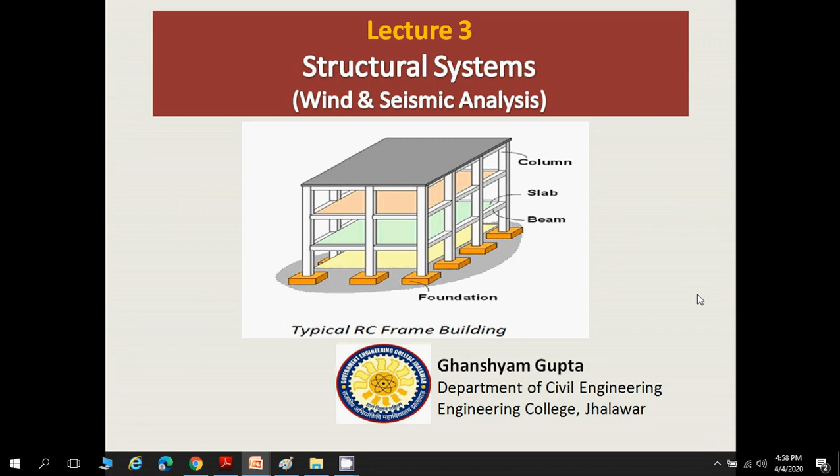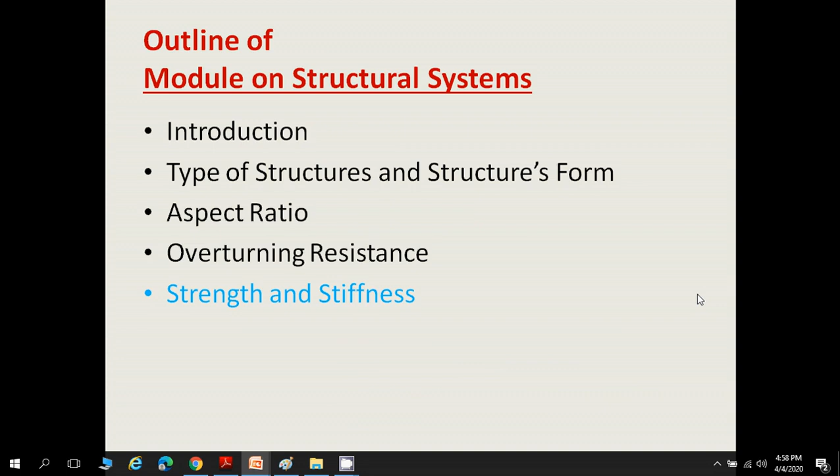Hi, welcome to lecture 3 of structural systems, on wind and seismic analysis. The outline of this module has already been discussed, and the above four topics were covered in lecture 1 and lecture 2. Today we are discussing strength and stiffness.

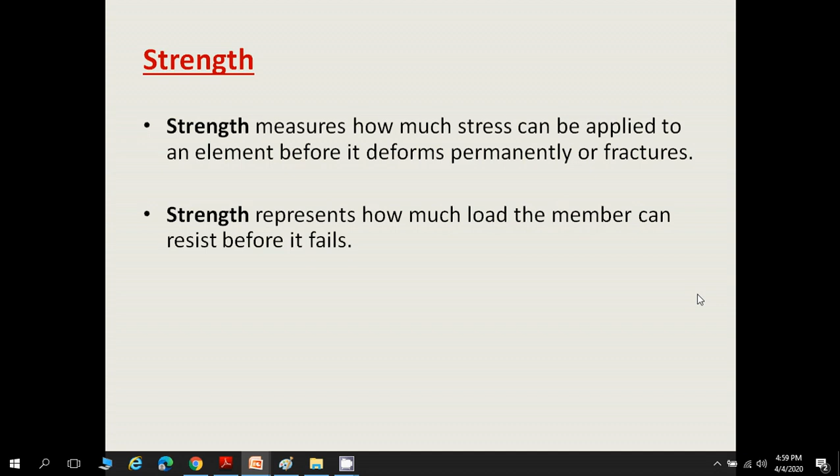First I'll introduce what is strength. Strength is a measure of how much stress can be applied to an element before it deforms permanently or fractures. In other terms, strength represents how much load the member can resist before it fails. So strength is a measure of stress, that is, how much stress can be resisted by the element before it fails.

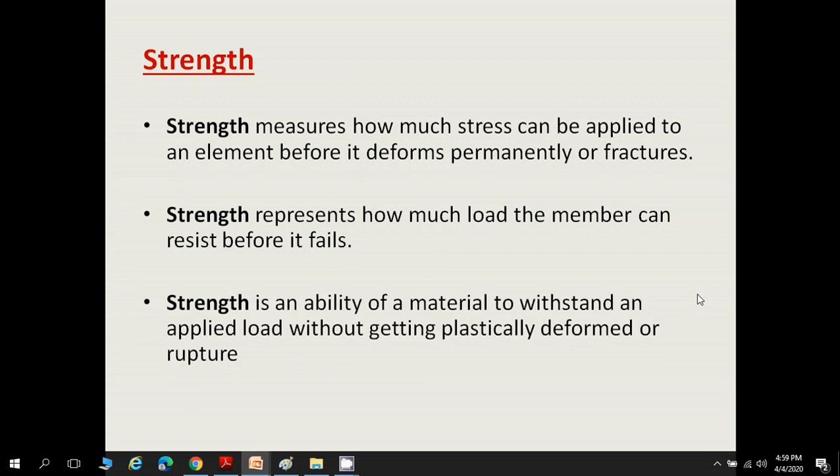In another definition, strength is called the ability of material. If we are talking in terms of material, it's the ability of material to withstand an applied load without getting plastically deformed or ruptured. So here are three definitions of strength.

Now there are some important definitions of strength that you have to keep in mind. One is yield strength. As you have already studied these types of strengths in your subject strength of materials, I am describing them again. Yield strength is used for materials that exhibit elastic behavior. It's the maximum tensile stress that the material can handle before permanent deformation occurs. So this is yield strength.

Another one is ultimate strength. It refers to the maximum stress that can be carried by a material before failure occurs. So before failure, the maximum stress carried by the material is called ultimate strength. The last one is fracture strength. Fracture strength is the value corresponding to the stress at which total failure occurs. So at the time of failure, the stress carried by the material is called fracture strength.

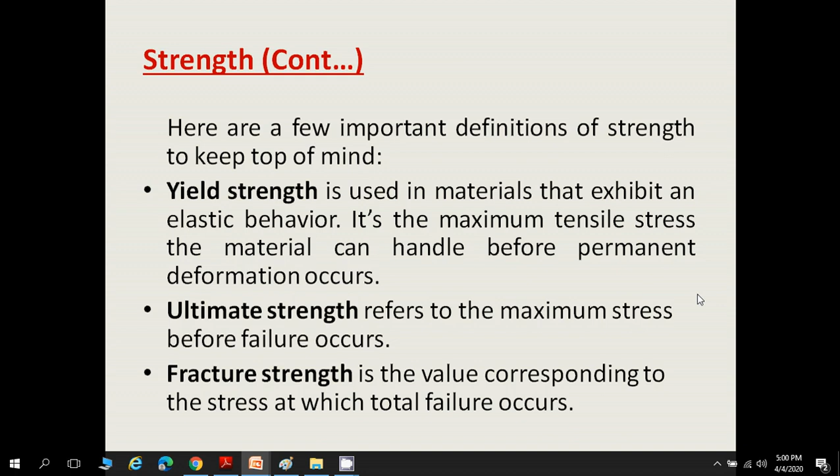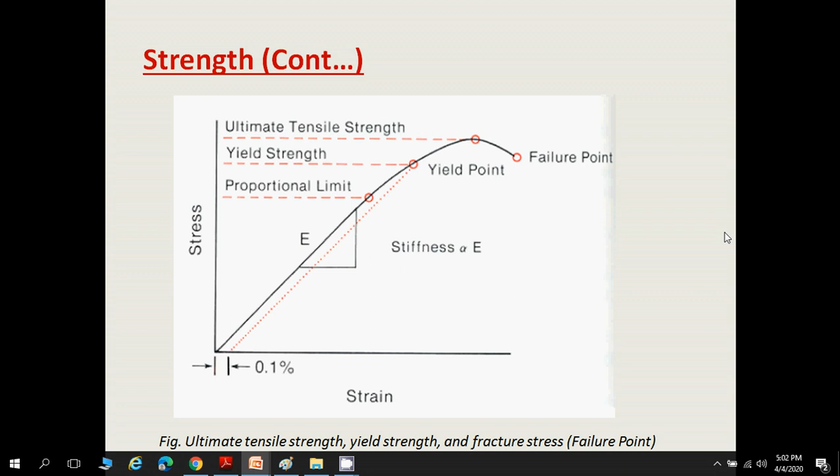Yield strength is the stress carried by the material or element before it goes for permanent deformation; that point is called yield strength. The maximum strength carried by the material or element is called ultimate strength. From this point on the graph you can see the ultimate strength, which is the maximum stress carried by the element or material. And fracture strength is when the material is about to fail. So from this figure it is clear how the different types of strength are represented.

Another term is stiffness. Stiffness is an indicator of the tendency of an element to return to its original form after being subjected to a force. So when force is applied, the material gets deformed, and after removal of that load, the material regains its shape, or the element regains its original shape. That is called the stiffness of that element.

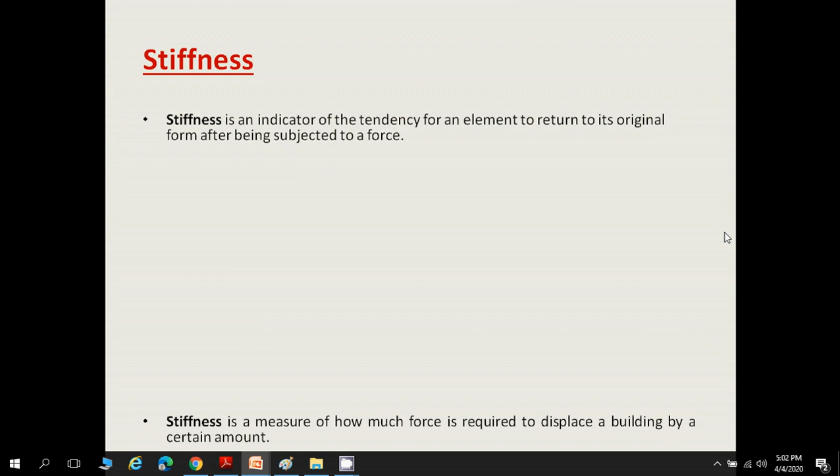Another definition: it's a measure of how much force is required to displace a building by a certain amount. So for a certain amount of displacement, how much force is required to be applied on that building is called the stiffness. In another definition, stiffness is the degree to which an object resists its deformation under applied load. So when load is applied, how much deformation is resisted by the element or material is called stiffness.

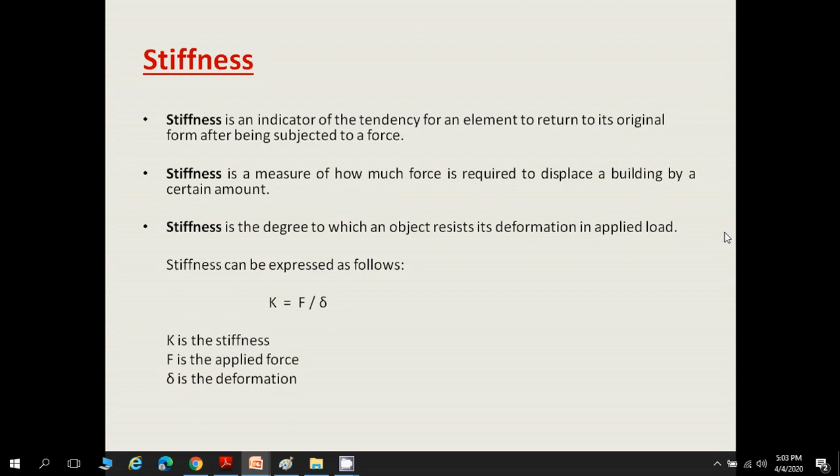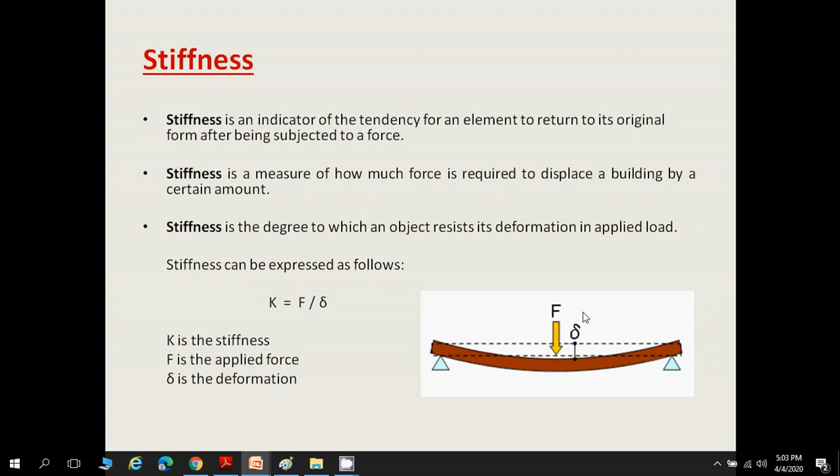Stiffness can be expressed as K equals F divided by delta, meaning for a unit displacement, how much force is required, K. Here K is the stiffness, F is the applied force, and delta is the deformation. This picture shows that when there is no load, the shape of the beam is shown by a dotted line, and when force F is applied to this beam, it deflects downward by an amount delta. So the stiffness of this beam is K equal to F divided by delta.

So what is the difference between strength and stiffness? There is a lot of confusion between the two. First, stiffness generally depends on the modulus of elasticity... actually, when load is applied, the structure gets deformed or displaced, but after removal of that load, if the structure or member can regain its original shape, that is called stiffness. Strength depends on the material's yield strength or its equivalent. So strength depends on yield strength, and stiffness depends on the modulus of elasticity.

The second difference is that stiffness refers to the amount of deformation under the applied load, while strength represents how much load the member can resist before it fails. So stiffness is about resisting that deformation - how much deformation can be resisted by the member due to applied load is called stiffness, and strength is how much load the member can resist before it fails.

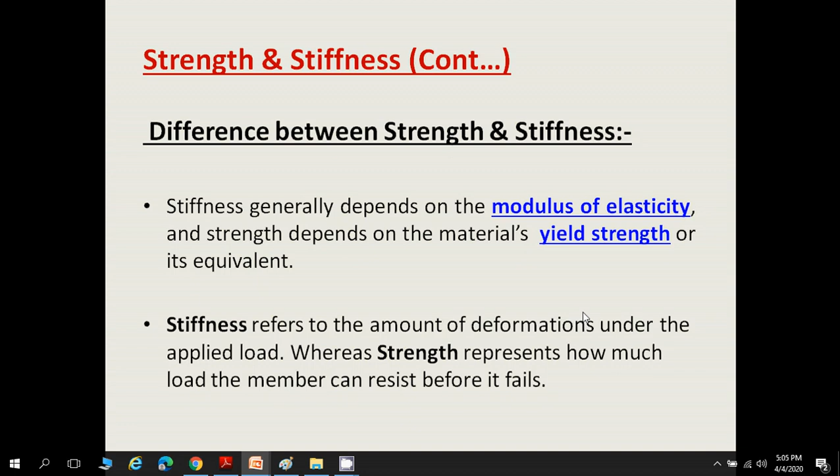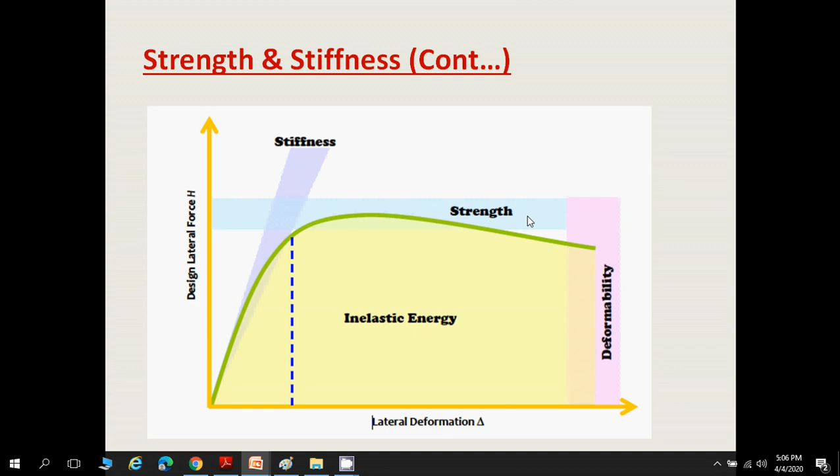So to understand the difference between strength and stiffness, here I am taking an example of a piece of chalk and a piece of rubber. We are considering a piece of chalk and a piece of rubber with the same cross-sectional area and the same length, so the dimensions of the chalk and the rubber are the same.

If we try to bend the piece of chalk, it does not deform, but it can break. Why is it breaking? Due to having low tensile strength. Therefore chalk has large stiffness but low strength. Why? Because it is not going for a deformation or displacement, it's not going for a displacement, it breaks. So breaking happens before deformation, so it has low strength and large stiffness.

On the other hand, if the same amount of load is applied on the rubber, the rubber easily bends but does not break or fail, even when it is folded. So compared to chalk, rubber has low stiffness but high strength, because it bends. The rubber goes to a bend or a fold but will not break. So the load carrying capacity of that rubber before fracture is high, so it has high strength compared with a chalk piece.

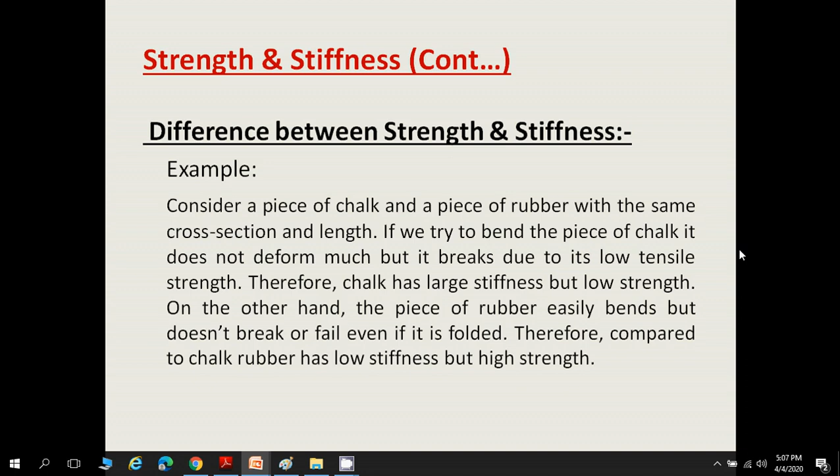Now if a building material, building element, or a building is subjected to any kind of load, it goes on to be deteriorated with time, and it does not perform well when subjected to lateral forces or other forces. So what are some strengthening techniques we can adopt to improve its load carrying capacity? The first one is jacketing of column, which we can do to improve its load carrying capacity.

If the column has deteriorated due to moisture ingress, or some amount of cracks have developed on the columns, then column strengthening can be done by jacketing. We can place a wire mesh around the column and then place new concrete on that column, so the strength of concrete can be increased to its design strength.

Second is post-tensioning of existing beams. If the existing beams cannot perform well when subjected to a flexural load or a lateral load, how can the strengthening of an existing beam be improved? It can be improved by post-tensioning.

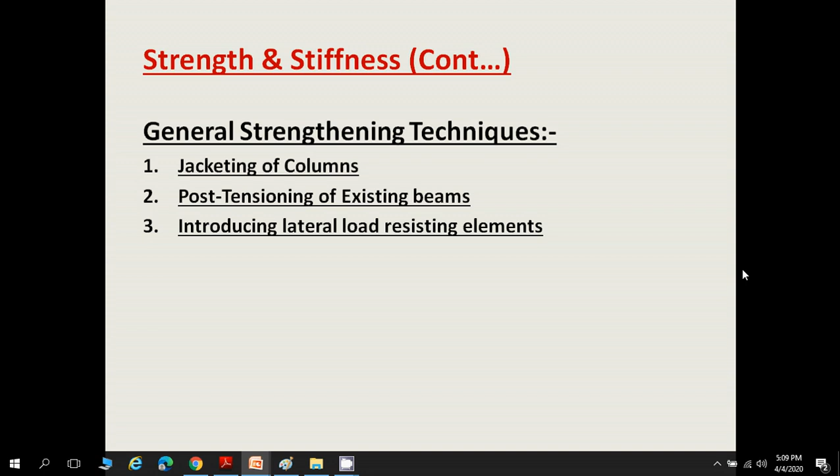Third is introducing a lateral load resisting element. If the building is subjected to any lateral force, such as seismic force or wind force, how can the building resist these types of lateral loads? We can provide a lateral load resisting element such as shear walls around the building, so that they can resist that lateral load and enhance the capacity of the building.

Fourth is underpinning of footing. If the building is subjected to any kind of lateral load, it can slide or overturn. So if sliding of the whole building occurs, to prevent this sliding we can do underpinning to the footing, so sliding can be prevented by this method.

Fifth is local replacement of damaged concrete and steel. As the concrete or steel is damaged, it can be replaced by new concrete or some repair technologies, so that they can perform well.

Why will the concrete and steel be damaged? There are some failures due to shrinkage and creep, or corrosion will start in the concrete due to moisture ingress, so the steel will start corroding and it will not perform well. So we can replace that concrete and steel with new concrete and steel, so its strength can be increased.

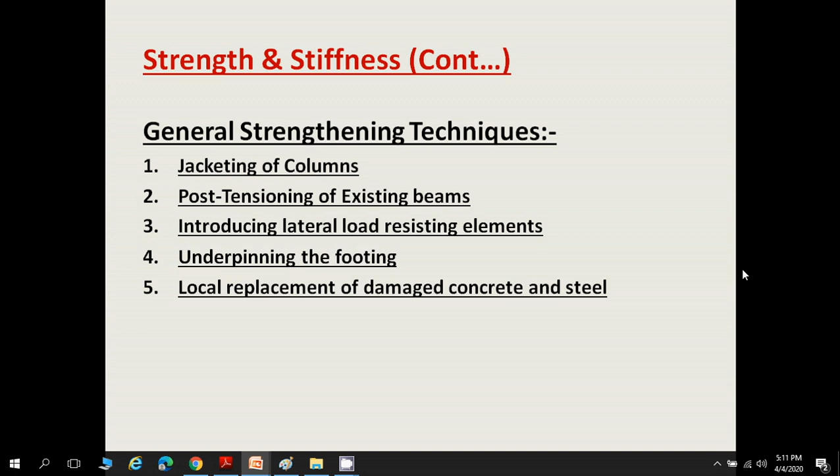Repairing cracks by injection of epoxy grout: some minor cracks can be repaired by special techniques using epoxy grout, which will set soon and perform well. Its strength is very good, so we can inject that epoxy grout into the cracks so the building will perform well. And the last one is shotcreting.

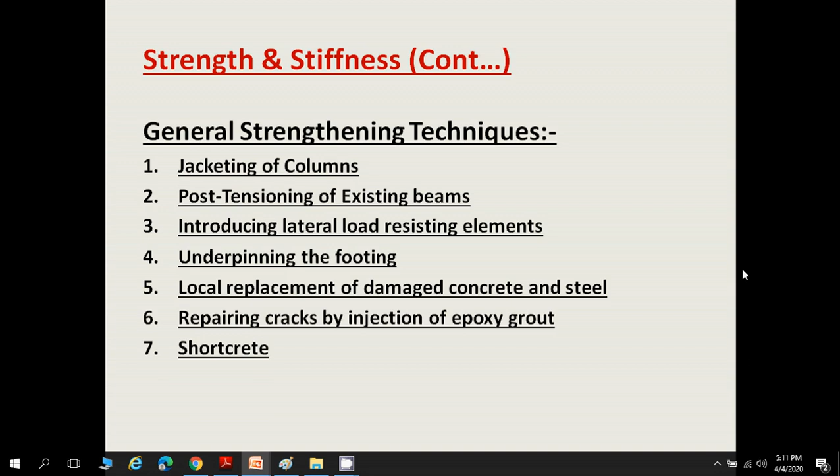We can also do shotcreting. So these are some strengthening techniques. Other than these, there are a lot of strengthening techniques that we can use. Here I have listed only 7. So we can do some strengthening techniques, and the building can perform well.